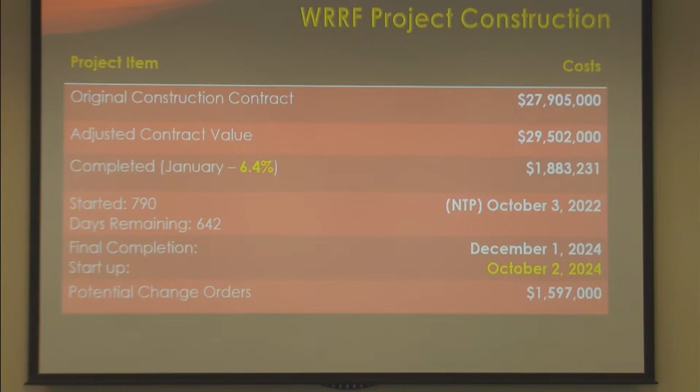So then this collection system north contract. The original value is $5,024,000. Adjusted value is the same because we haven't had any change orders yet. They've been doing a lot of good work up there. So the project, based on value, is considered over a quarter complete at this point, and you'll see as I start moving through some of these slides why that is.

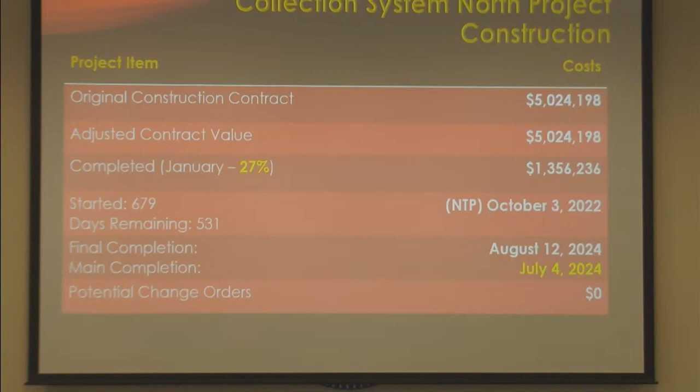Can I ask a question? When you say you're ahead, what percentage did you think would be complete at this stage? You're saying it's 27% complete? Right. What did we expect? Were you expecting 15% completion at this stage? Yes, it would have been down around 15%. Okay.

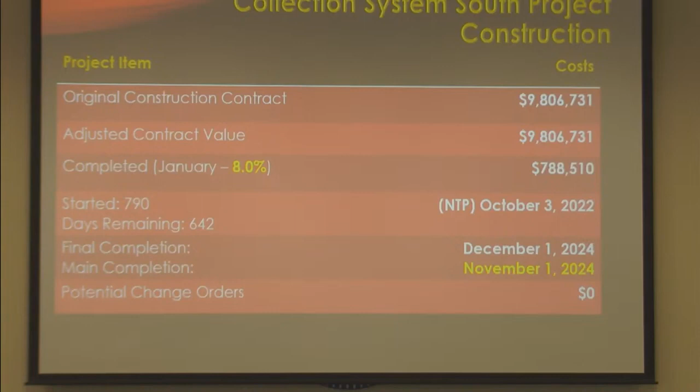So this is the project area north. This is a newer map. We're going to have a north and a south map now instead of one map for the entire area. I put the legend on the left-hand side. When you see the yellow lines, those are mains that are already installed and completed. Green lines represent the mains that have to be installed. So you can see in this area here, you have Drew and Butler that are remaining to be done. Blue lines represent pressure mains.

You have a couple of small ones here at Sea Oaks, and then down here you have the force mains that are coming up from the southern area. The red represents the current work area, meaning as of now, March, even though this is a February report. So there's a lot of work that has already been done throughout this area. The Sea Oaks mains are complete, they are in, but they still have work to do with respect to manhole covers, which I'll be talking about later, and/or service installations in certain areas. So Sea Oaks, the main is in, but the services are not yet.

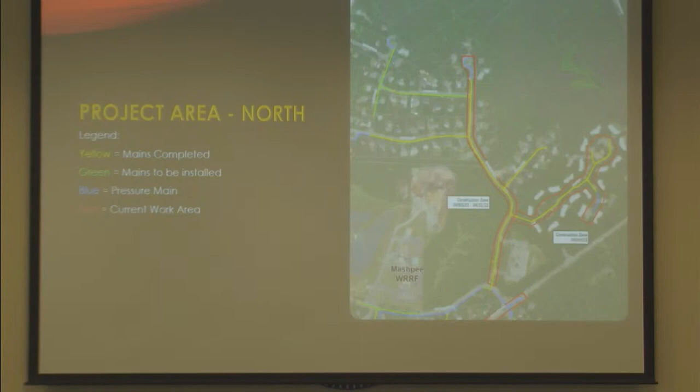And I do love that. Ship's anchor, ship's compass, ship's rudder, and then you got shipwreck, you know, at the very end. I'll never get over that.

So, up at the plant, you can see it's a little bit different. Last time that I showed a slide like this, it was really a big sand pit, all right, play box. But you can see that they've gotten a substantial amount of work done. This is not all the underground piping, but this is the underground drainage piping.

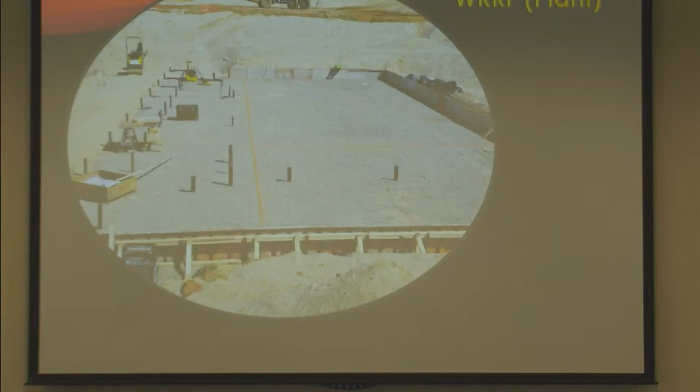Then they have a bed of stone here, and across here you can see wood and steel forms going around the peripheral area. This is the process building, so they haven't laid the concrete in there yet, but as you'll see on another slide, the equalization tanks, they actually poured concrete today. So they're making very good progress at the plant.

So on the left screen here, this is the equalization tanks. They have the rebar and the forms are in place, and they poured concrete in that today, and that was, I believe, 1.5 feet, 1 foot 6 inches of concrete for the base slab, and I think the process building is going to be 1 foot 4 inches, if I'm not mistaken.

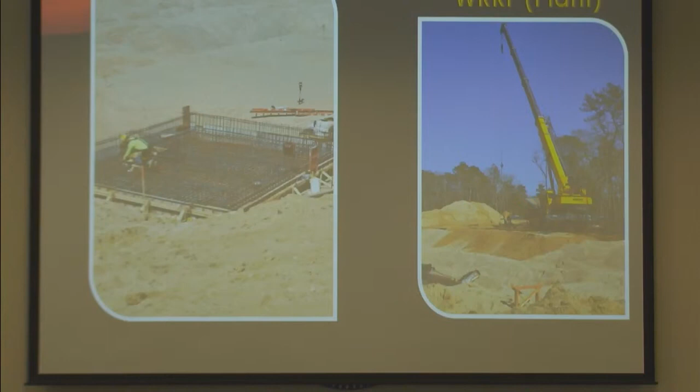They did bring their crane in. This crane has less than 100 hours on the hour meter. It's brand new. The tires just got dirty, but it's a beautiful piece of equipment. Right now they're using it to pour concrete, as well as to move bundles of rebar, which are very heavy, down into the work areas. And they'll also use it for transporting materials in or out of the pit itself.

So, for the collection system north, for Carlton, Swain, and Sewall, all of the manhole frames and covers have been installed. I'll be talking about them in a minute. The 8-inch mains are already in Sea Oaks, as well as the 2-inch low pressure mains. They were installed this week. The picture on the right is just showing a manhole installation. I'll be talking actually quite a bit more about some of that today.

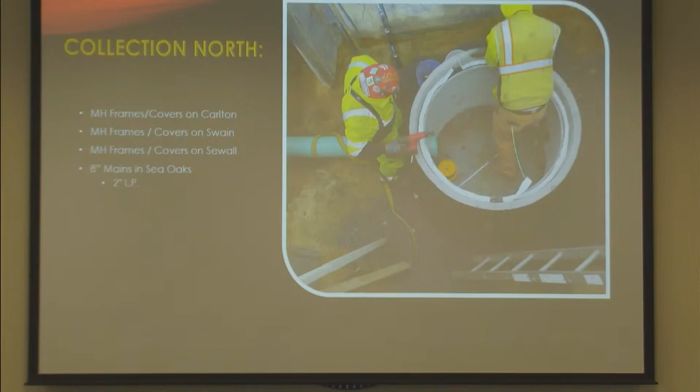You can see the green SDR-35 sewer pipe that was placed into the manhole, and then there's a rubber gasket that you can't see. It's in this vicinity here where they seal that opening. So this was just the first base of the manhole that was installed here.

Collection system south, the main is in on Simons Narrows, and main is in on Mashpee Neck Road from Simons all the way to Quinaquisset, and that's not one main, it's 2 mains. So here on the right, you have the 8-inch gravity main, and this is a service fitting for a home. And then this main over here is SDR 21. That is the force main that runs the length of Mashpee Neck Road coming from the lift station.

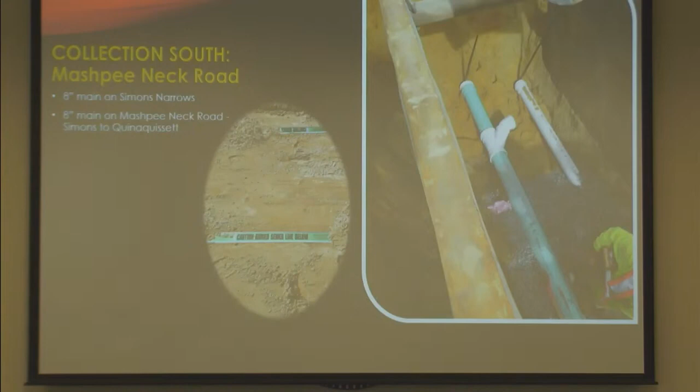So because there are two mains in the ground, these are two tapes that are placed about 1.5 to 2 feet below the surface. They're magnetic tapes, so they're capable of being traced by an electronic detector. So one's over the gravity main and one is over the force main. And if anybody digs there that doesn't try to detect it and they encounter that, it has written instructions on it telling you it's right above a sewer main. All right, so it's hard to miss.

So this is the educational portion of today's presentation. I was thinking to bring the community up to speed. You're building a sewer system, spending money on it. What are you building? It's got a lot of moving parts and a lot of parts that don't move. Manholes don't move, they don't go anywhere, all right?

But contrary to the name, and I realize that to be politically correct, the name probably has to change, it's not a manhole. A man does not live inside of it, all right? So everybody has seen these, they're everywhere. You see them all over the road, you drive over them every day, and nobody knows why they're there or what they do. So that's today's goal.

So what you're seeing on the left is just the cover. What you're seeing on the right is a frame and cover, all right? So you have to have a frame that supports the cover, and then the frame goes on top of the manhole structure, and you have a bricklaying crew that comes in and facilitates that structure going on there.

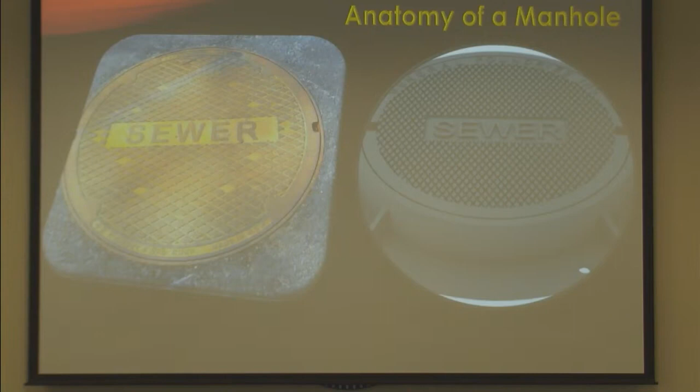You need to become familiar with this because you're going to have one of these. Once the system is complete, through the town's GIS system, maps like this will be developed. They're very, very technical. They contain a lot of database information behind it for every piece of pipe and every manhole and every service connection, so that you can get within 6 inches of any of those components at any future time. This one's fairly basic. It's just showing you the main and the manhole.

A lot of maps, you can show the size of the main, what type of main it is, whether it's a force main or a gravity main. And you can also show the direction of flow for the mains through the manholes, okay, give you a better picture of what's going on overall. But you will need to become familiar with it because you're going to have one designed for you.

So why do we put a manhole in anyway? All right. From a construction perspective, anytime a pipe changes in elevation from high to low or low to high, you have to have a manhole, all right, because you can't deflect the pipe. You can't bend the pipe. So it can't go up or down, and it can't go left and right. So the only way to make those changes in the ground is to put in a manhole.

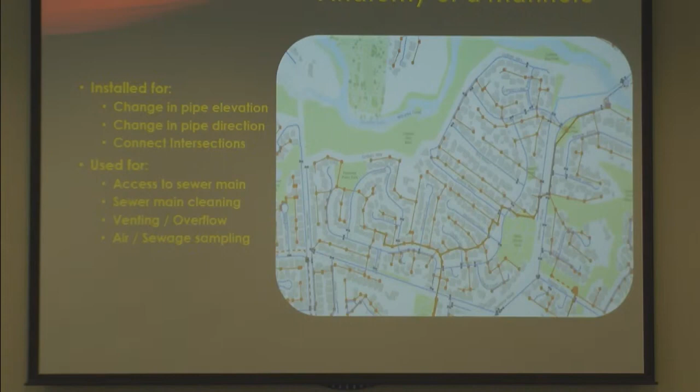So what do we use them for, though, after the fact? That's why they were installed to begin with, but there are uses for them after the fact. You need to have access to the main. All right, you put in a sewer system below ground, various pipe sizes, and eventually, sooner or later, you need to get to that pipe. The manhole facilitates that without digging the road. Sewer main cleaning is probably the biggest reason down the road that you need to have access to the main.

Venting and or overflow, those are kind of in the old days. In the old days, you would see a manhole, sewer manhole specifically, sanitary sewer manhole, they would have holes in the top of it. So I'm sure you've seen them in some cities. Those holes facilitated venting of sewer gases in a manhole. And or it can serve as an overflow point if the main ever backs up.

And then air and or sewage sampling. So for air sampling, that deals with the quality of the air, and it becomes a safety issue from an entry point of view. And sewage sampling, there may be time in industrial areas where you want to take a sample and send it off to a lab. You can open a manhole, access it from the surface, grab a sample, send it off to the lab, find out what's in that wastewater.

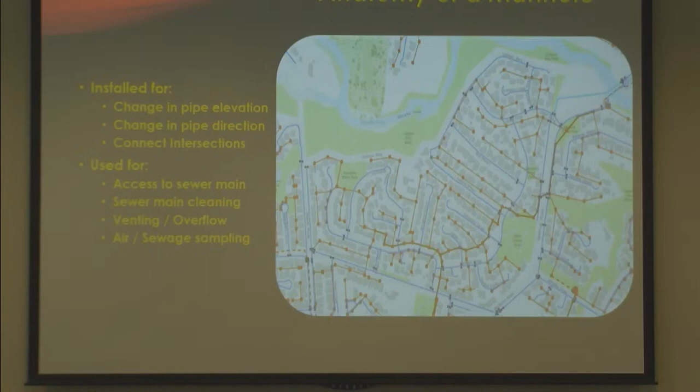So you have a pipe coming in, you have a pipe going out. The pipe doesn't go through the manhole. It comes in, it's cut off, goes out, it's cut off. So you have to build something inside so the water's not just flowing indiscriminately into the manhole and then filling up and flowing out, all right?

So at the invert level, you have to build that invert with bricks to channel the flow through the manhole. Then we come up to the barrel section.

You can have multiple barrel sections, which we do on this project. You'll put the base section in first. You could have other barrel sections when you're on a deep manhole to come up to a higher elevation.

The last section that's usually put on is the cone section. The cone section is an eccentric cone, and the reason being is so you can see the manhole steps.

In the old days, they used to put not an eccentric one, but the manhole itself was centered over the whole opening. So if you wanted to get in there, once you got in, you had to actually move your body over to the steps in order to get in and out. Very, very dangerous. So now with eccentric manholes, that hole or opening is right above the steps.

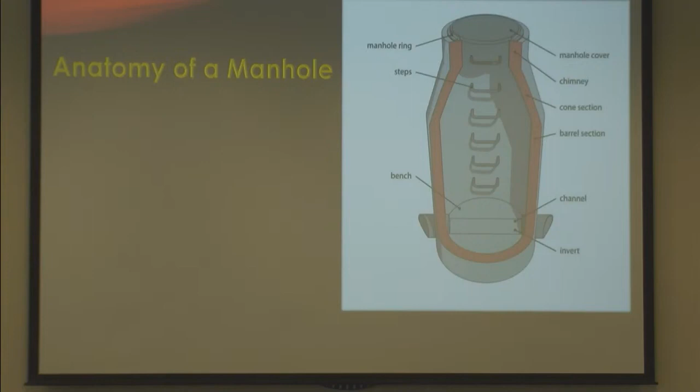You can always tell which one is the base part of the manhole as opposed to a cone structure because it has a lip around it. These are prefabricated by a concrete firm and then delivered on site. They're very specific for a very specific location on site as far as where the holes are, what degree of deflection those holes have if a road doesn't line up. So these are constructed based on the design drawings for the system.

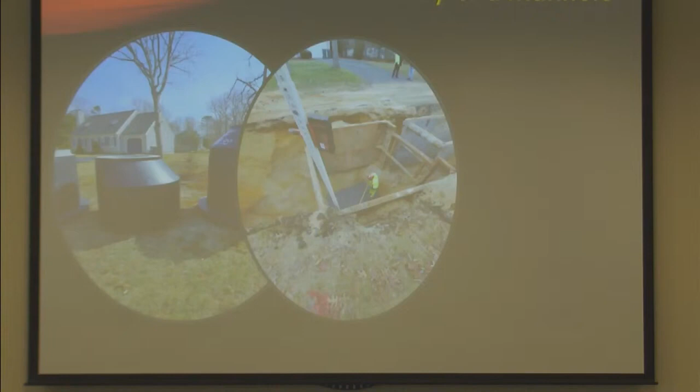That's what this device here is for. It tells him exactly what depth to put that sewer base so that it's always correct. Then they will place the manhole where he painted that red circle down at the bottom.

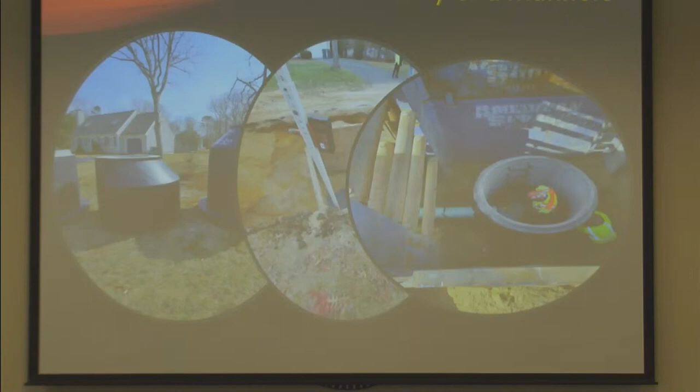This is the upper section, or the last piece that would go on a manhole. You can see there's a hole offset in it, right over where the manhole steps would be.

You have two little steel cables here, one here and one here. Those are for lifting. After they get it in place, they saw cut them off.

After this, since this is the last piece that goes on, a crew will come in and they will build the base for the frame and cover out of brick and mortar.

This is showing a similar manhole where they're preparing for testing. What they have here, that opening there is actually right here, and they put an insert in with a bladder around the end of it to seal that top opening.

Then they have hoses connected to it, and air pumps associated with it, and they're testing the main for tightness to make sure that it doesn't leak. This crew is doing this as they're putting these manholes in, which is great, so you know that the integrity of the manhole is going to be good over time.

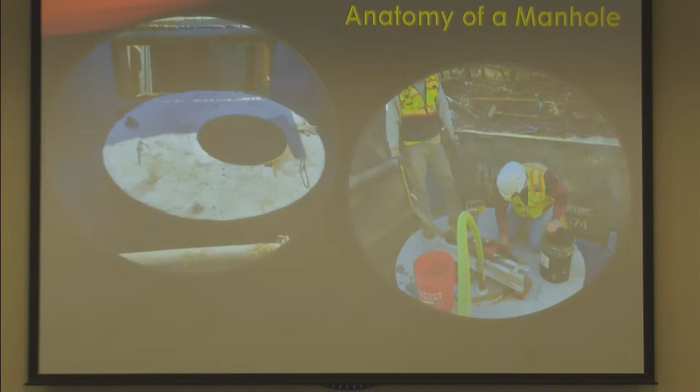This is that top section I referred to where you have masons come in. There's a specialized crew that comes in and does this. You can't see the top of the manhole actually, because that's down here. But what they did is they built this out of brick and mortar on the top.

Then the manhole frame is under here, and that's the manhole cover there. They have to do it this way because no matter how accurate you are with the actual manhole sections, you've got to be able to make a final adjustment for exactly where that road grade is going to be.

Otherwise, the manhole's going to be too low or too high. So even if you drive around the system, you'll see some of them raised a little bit. That means the final elevation of the road after the project's done is going to be at the elevation where you see the manhole. So that's why it's raised a little bit, and they build an asphalt ramp around it to avoid damaging vehicles.

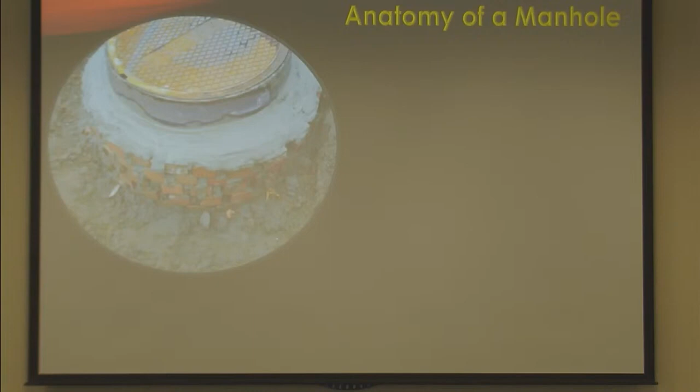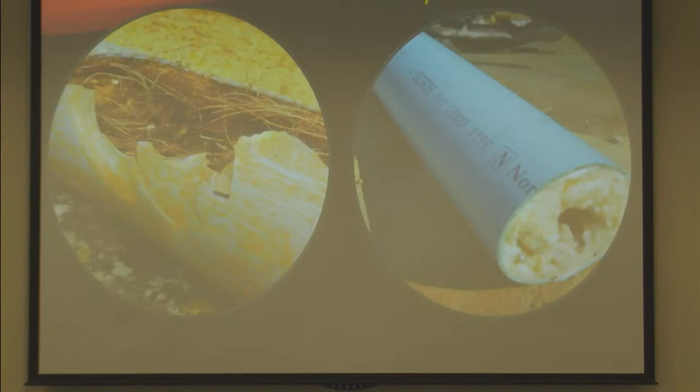On the right is a grease clog. This is SDR35 pipe, which is what we are installing. So the fact that it's a plastic type of pipe does not mean it inhibits clogging from grease.

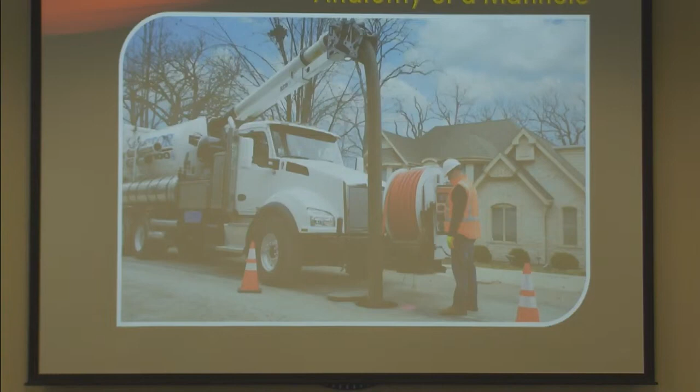But this is for cleaning, so it has its own water, just like a fire truck carries a couple thousand gallons. This carries its own water supply to facilitate that hose.

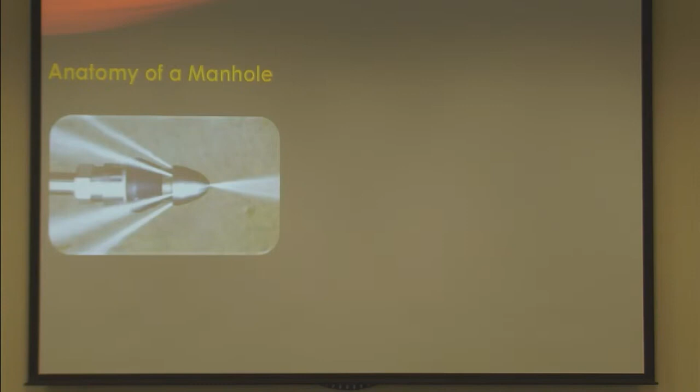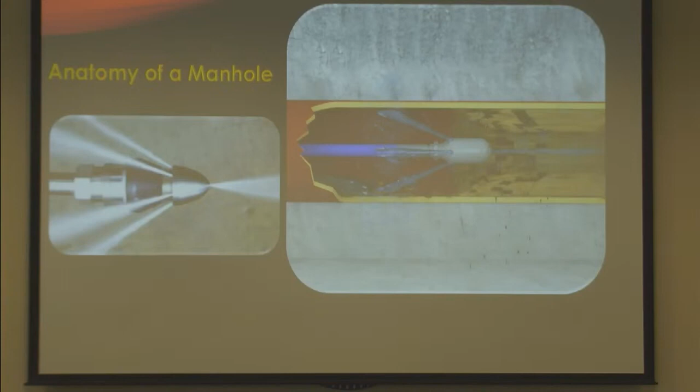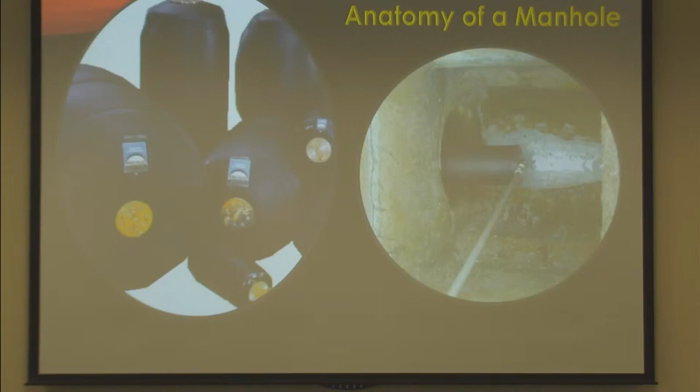It's important to do that when you're cleaning a main, because in this case the cleaning would occur over here—that's where the cleaning hose would go. But once that goes up and starts cleaning the main, you don't want that debris traveling down to the next main. So this stops it in the manhole, and therefore it can get sucked out.

This is what I was getting to with all that. You own a sewer system, you're going to own a confined space program. What is it? By definition, it means it has a limited means of ingress or egress and a known potential hazard associated with it. So that generally means whatever structure you're talking about is one way in, one way out. All right? So it's intrinsically dangerous if there's a hazard associated in that structure. Manholes fall into this category.

So hazards could be electrical. Sewer manholes normally don't have electrical components in them, all right, but electrical manholes do. Chemical, that can be associated with sewer. Atmospheric, definitely associated with sewer, and I'll get into that a little bit too. And of course, some of these manholes are relatively deep. It's always a fall hazard, so you have to have fall protection. To enter a manhole by modern standards is a minimum of a two-man job.

By OSHA standards, they would characterize it as 3, but the difference here is that as long as the attendant is duly trained to be an attendant and a supervisor, you can do it with 2 men. But it takes one that's trained as an entrant to go in, and then one has to stay outside all the time in case something happens.

A tri-detector, it's an electrical device that you lower down into a manhole, and it does 3 tests: combustibles, toxics, and the oxygen level, right? So combustibles, you could have methane gas in a sewer. There are other gases that develop as a result of decomposition of organic matter. Hydrogen sulfide would be one. That doesn't fall into the combustible category, it will be in the toxic category. But it'll give you readouts of what these gases are.

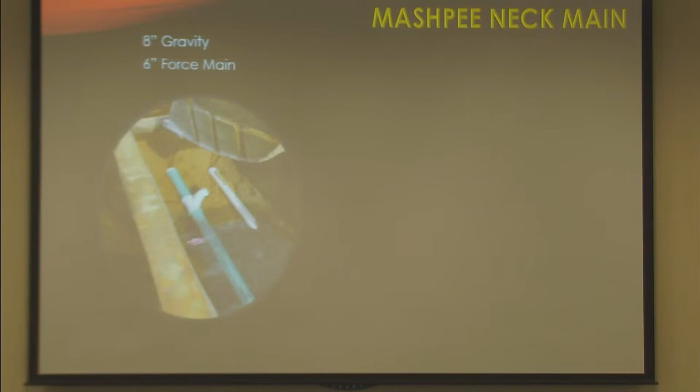The oxygen level at 21%, once it goes below 19.5, you're going to be unconscious. So it's a very short range, and wastewater consumes a tremendous amount of oxygen, all right? So you usually can have an oxygen-deficient atmosphere in a manhole. This I showed you before. This was just a Mashpee Neck main, and by the way, that concluded my little presentation on the anatomy of a manhole.

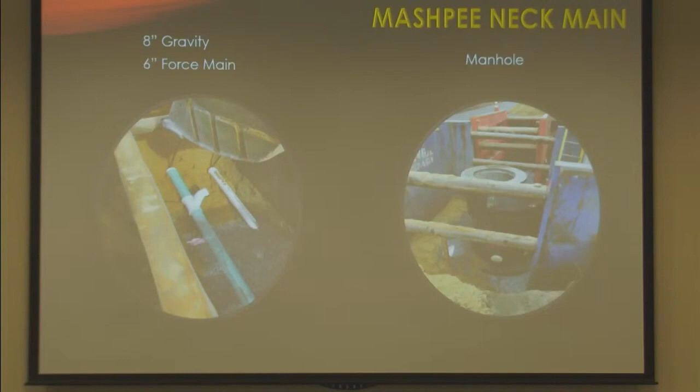Okay, so what we have upcoming at the resource facility or the treatment plant, they'll be excavating for the process tanks. So they'll be digging a 3rd big pit, all right? And that's all the tankage where the membrane reactors are going to be. They have to install a fair amount of underground piping. Then they're going to be pouring foundations. You didn't see it in the picture today, but I did take a picture today. They poured concrete in the equalization basins today, and you'll see that on the next progress report. But they'll be pouring the foundation for the process building as well.

On the north side, they're going to finish up the CO mains, and then those crews are going to the Route 28 mains. And then on the south side, Simons Narrows next week, they'll be doing some of the services on Simons Narrows. The Mashpee Neck Road main is pretty much done as of today. And then that crew is also going on the Route 28 mains. So they're basically corralling all of their crews to put them on Route 28. So it'll be 2 mainline crews out there, not just one. So my hope is that they're going to be as expedient as possible to try to get that done. And that was it. Any questions?

Yes, Mr. Jack, I have a couple of questions for you. Okay. Thank you so much for a very informative presentation. One of the things that you brought to mind is that there's going to be a need for education for those members of the town who will be connecting to sewer.